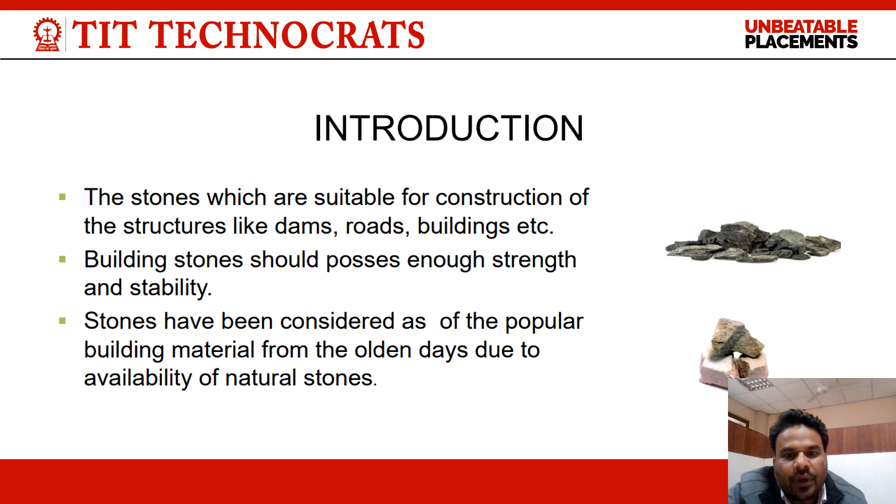First is the definition of stones. Stones are suitable for the construction of structures like dams, roads, buildings, etc. Building stones should provide strength and stability to the building. Stones have been considered a popular building material since olden days due to the availability of natural stones. Stone is a natural material which is always obtained from rocks.

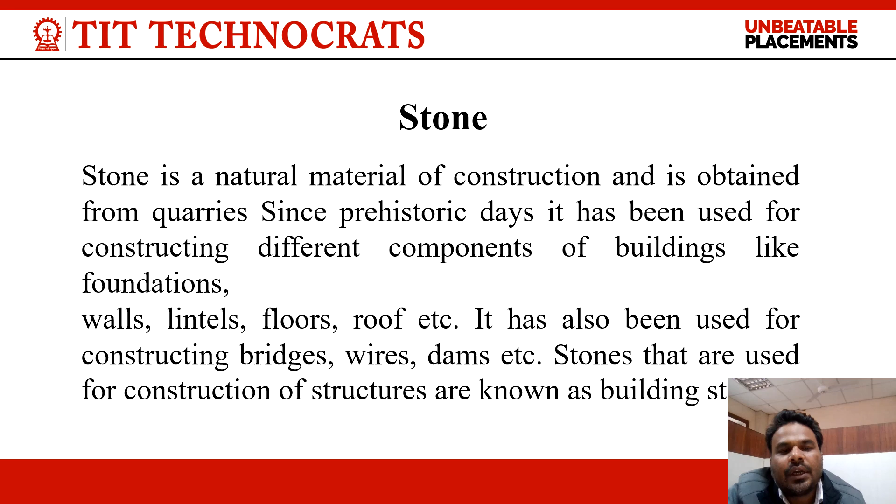It is used in walls, foundations, lintels, floors, roofs, and also in the construction of bridges, dams, and buildings. These are common uses of stones. First, it is used in the foundation of buildings. It is also used in the construction of dams and barrages, and it is also used as artificial sand.

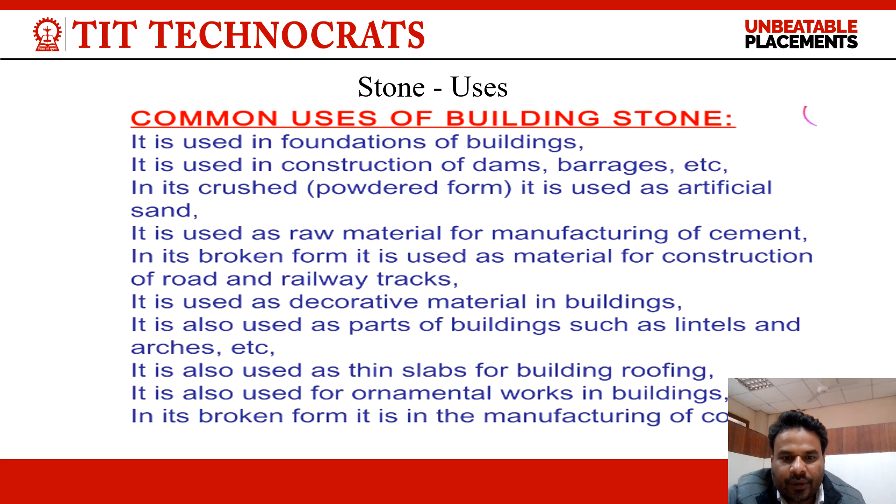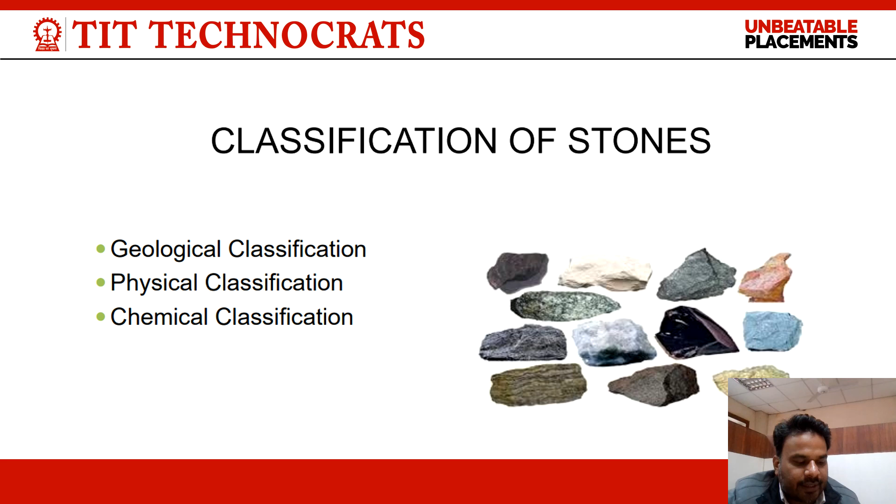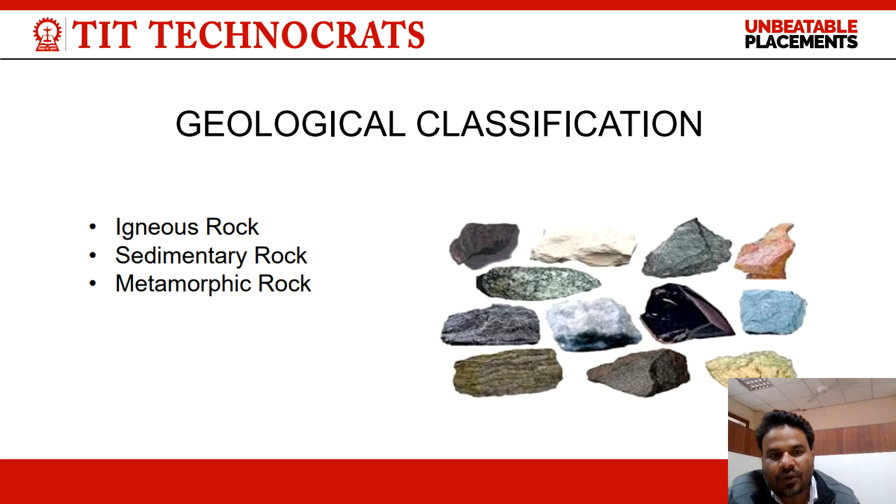These are the classifications of stones. Classification is based on geological, physical, and chemical properties. First is the geological classification of stones: igneous rocks, sedimentary rocks, and metamorphic rocks. Igneous rocks are primary rocks formed from molten magma. The cooling of magma results in the formation of rocks. This is an example of igneous rock.

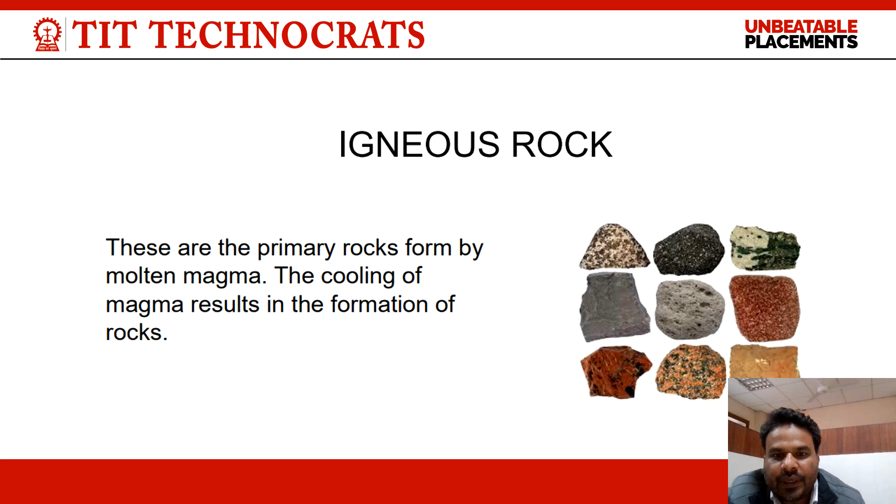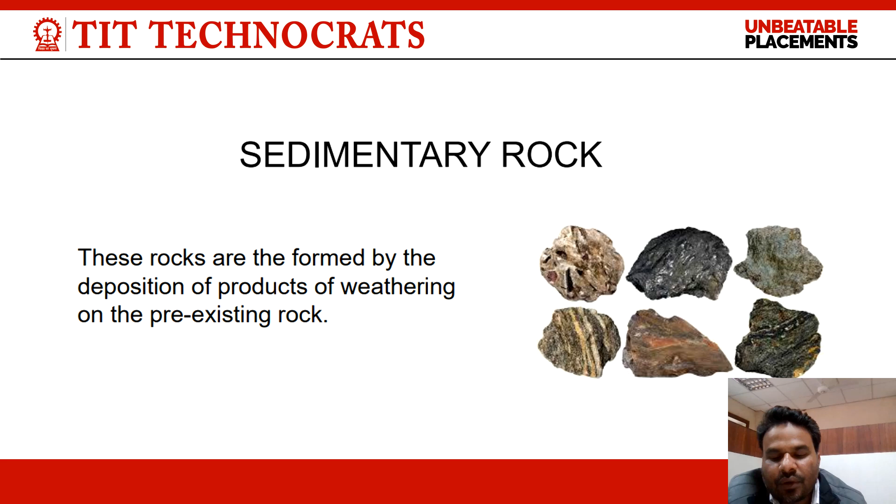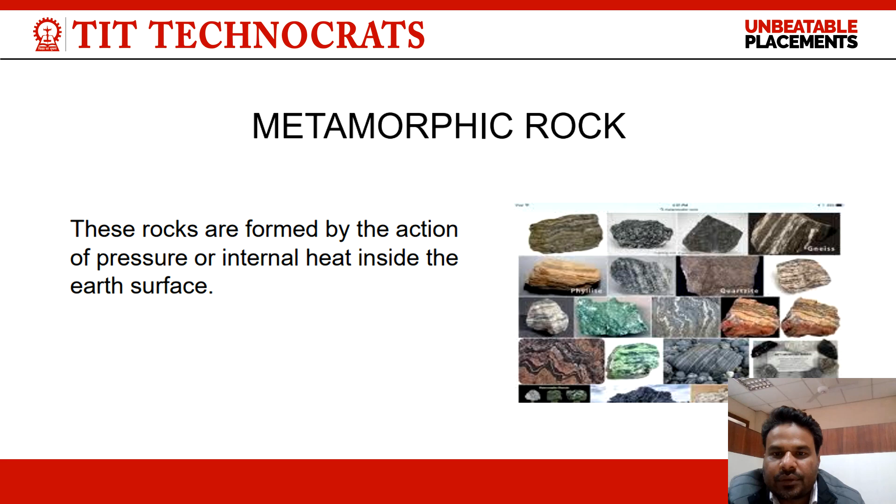Sedimentary rocks are formed by the deposition of products of weathering on pre-existing rock. This is a basic example of sedimentary rock. Metamorphic rocks are formed by the action of pressure and internal heat inside the earth. These are basic examples of metamorphic rock.

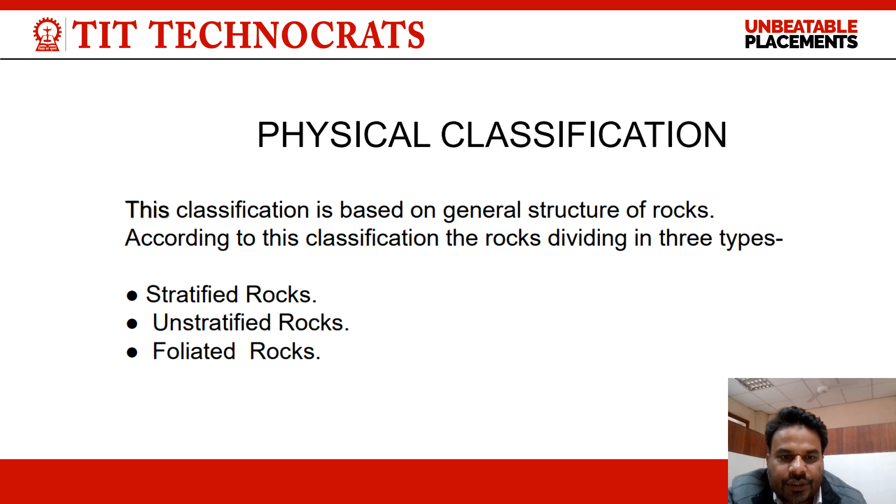The second classification is the physical classification of stones, based on the general structure of rocks. According to physical classification, rocks are divided into three types: stratified rocks, unstratified rocks, and foliated rocks. Stratified rocks possess planes of stratification or cleavage and can be easily split along these planes. Sedimentary rocks are distinctly stratified rocks, for example sandstone, limestone, slate, etc.

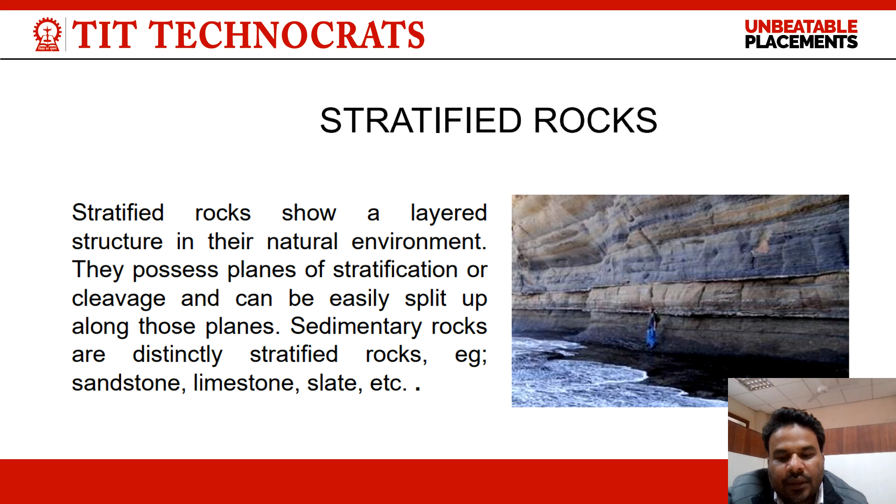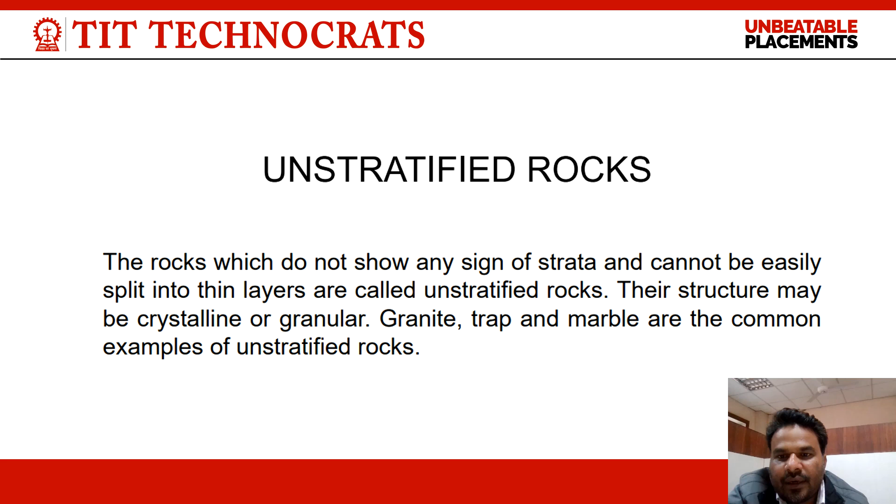Unstratified rocks don't show any sign of strata and cannot be easily split into layers. Their structure may be crystalline or granular. Granite, trap, and marble are common examples of unstratified rocks. Next is foliated rocks. These rocks have a tendency to split up in different directions. The foliated structure is very common in metamorphic rocks. A basic example is slate.

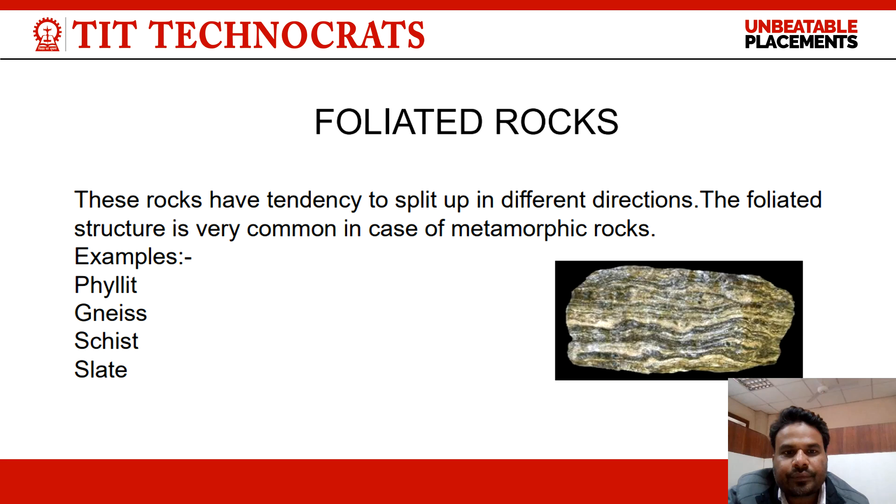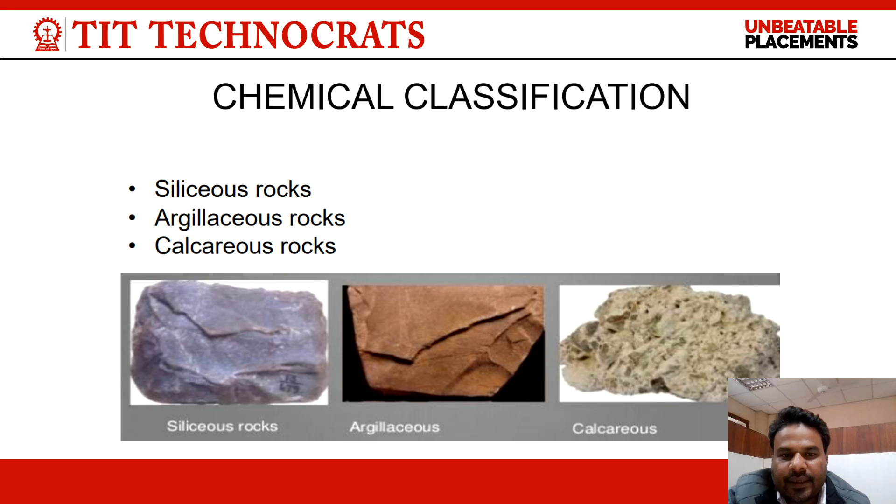The next classification is the chemical classification of stones: siliceous rocks, argillaceous rocks, and calcareous rocks. First, stones which contain silica as a primary constituent are called siliceous rocks. These stones are durable; examples of siliceous rocks are granite, quartzite, and sandstone.

Second is argillaceous. These are clay stones, which contain a large amount of alumina. Clay is the principal constituent of argillaceous rocks. Basic examples are slate and laterite. Next is calcareous rocks: stones which contain calcareous material as a primary constituent. Basic examples are marble and limestone.

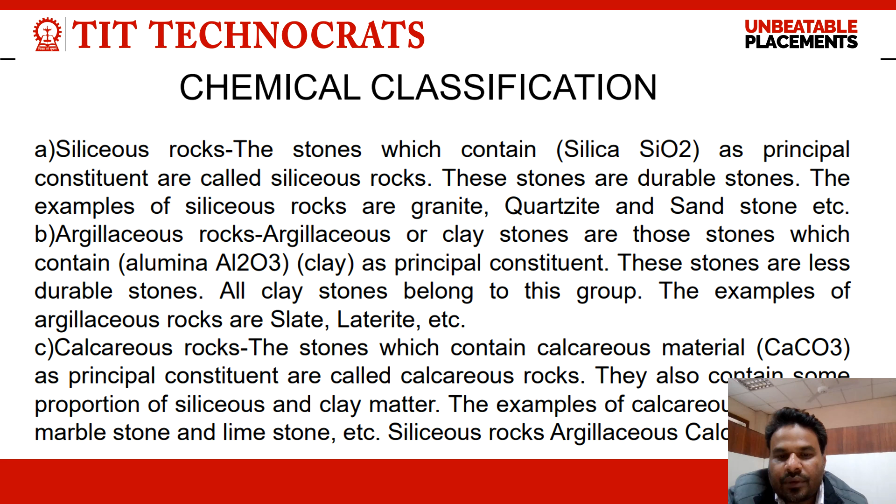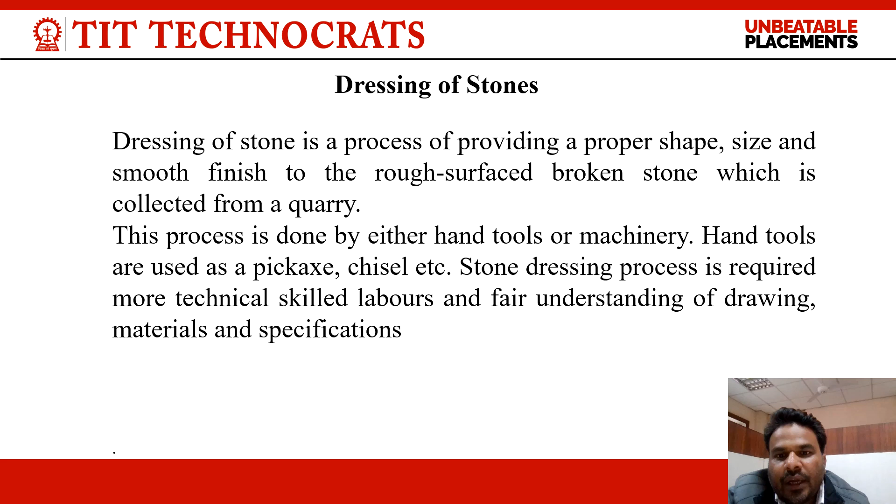The next topic is dressing of stones. What is the purpose of dressing? Dressing of stones is a process for providing proper shape, size, and smooth finish to rough broken stones removed from rocks, which are called quarry stones. Dressing is done either with hand tools, like pickaxe and chisel, or with machinery. Stone dressing requires technically skilled labor and a fair understanding of the material and specifications.

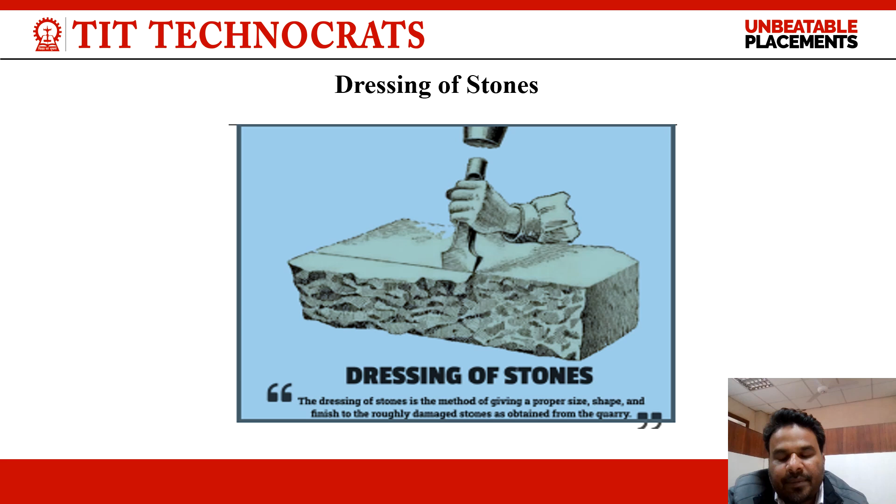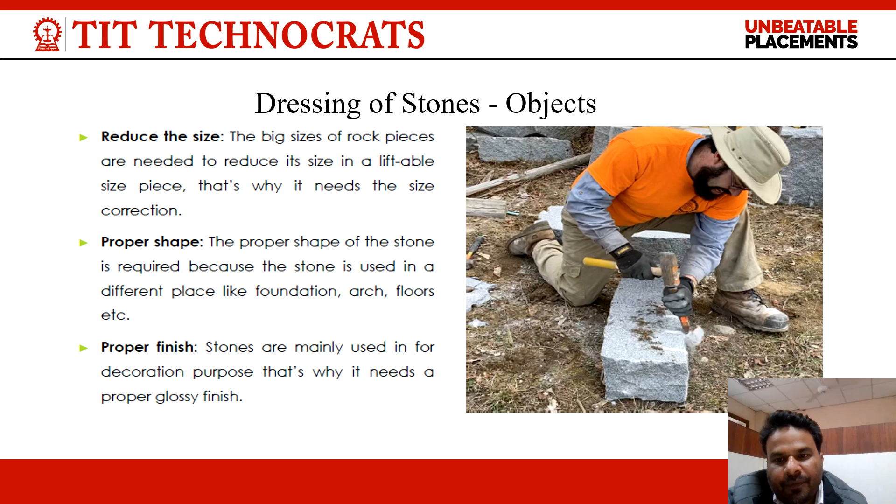This is an example of dressing of stones, giving proper shape and size. Dressing has several objectives: reducing size, proper shape, and proper finish, through sizing, shaping, planing, finishing, and polishing. For example, shaping is the process where we remove the sharp sides of stone blocks. Polishing is the last stage of dressing and is done only on marble, limestone, and granite.

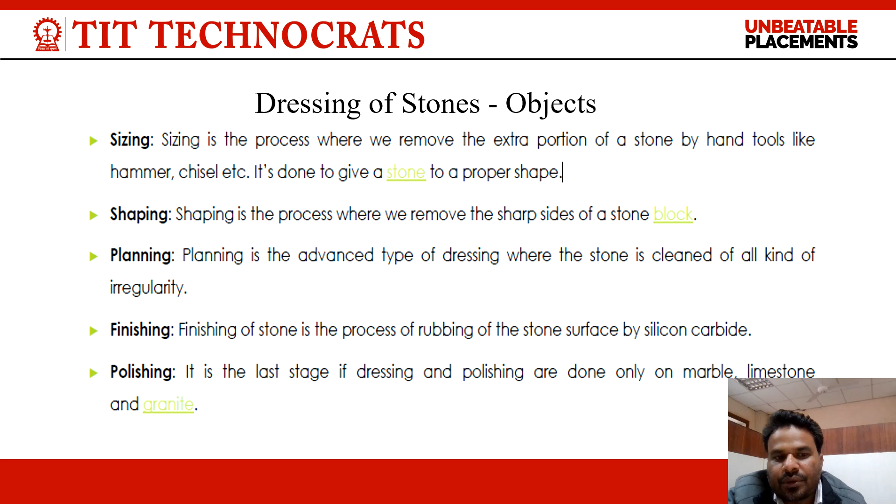Sizing is the process where we remove the extra portion of a stone with hand tools like hammer, chisel, etc., to give the stone a proper shape. Qualities and characteristics of good building stones: hardness, durability, porosity and absorption, reliability, weight, appearance and color, fire resistance and strength. These are the basic characteristics of good building stones.